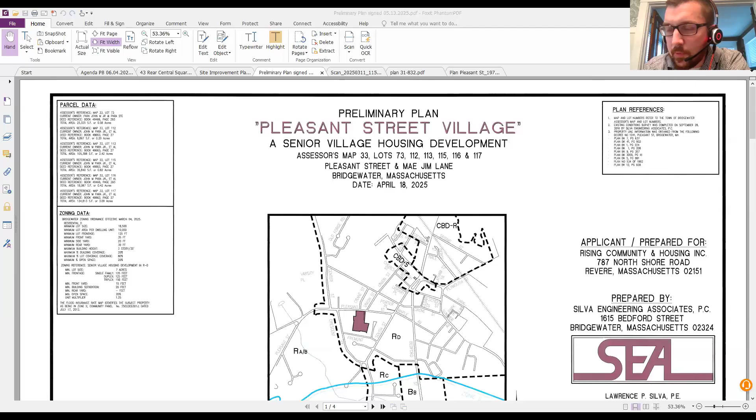Yeah, because reviewing it too, I had a question, because it included a large amount of open space - pretty much up to 40% open space, which seemed excessive. But a fair amount of the open space is constituted through the actual home or the exclusive use areas, where the 20% breakdown comes from the edges, as well as part of the front, behind those lot lines. What does that all add up to?

This open space here that I'm kind of - along the back and the side - that area is 66,000 square feet. And what percentage of the site is it?

The site is I think about 21 or 22%. I think there was some confusion because there's the area up front, the 6,000 square feet, and then around the edges. One question I thought about was that community space area, which I think includes all the open space featuring the dwelling units around the parcel, and it actually includes the area that is the road, because the road will be considered common, so that 70,000 goes from the open front all in here.

It would have to be defined as open space per the definition. Open space can't be paved. The area behind the units, that was the 66,000.

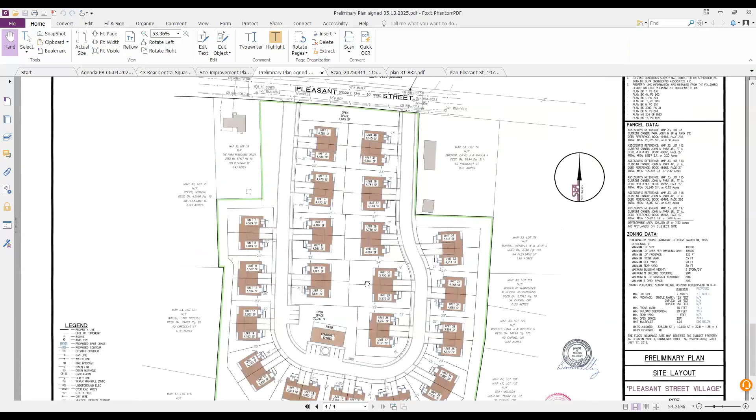That's 20% by itself, I believe. Then you get some on the front, that area along Pleasant Street as well as the area in the back. When I did the math, it was like 21 or 22% of the project.

So I think there just needs to be some clarification of what that square footage is around the community center, because I think that could be added as open space, as well as a patio or pavilion and all that jazz there.

Open space wouldn't be classified as the exclusive use areas. It would be outside that. I'd say that's 22%, that open space that's not necessarily within those use areas. And what's required in residential D?

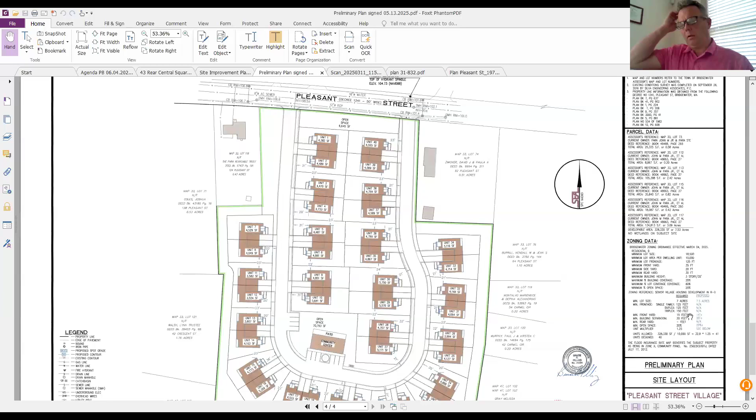Is it 20%? So it's 20% for residential D, and I think the other districts is 40%. But in the SHB, what is it in the residential? It's 20% for this district, for the senior housing village in this district, correct? Correct. Okay, all right, 20% open space as constituted by the ordinance.

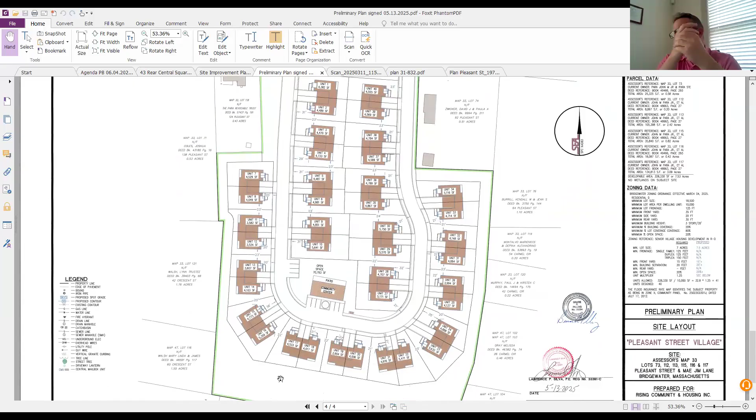In addition to the grass and everything else, correct? Sure, yeah, it's specified open space that's not necessarily belonging to a particular party. And this is at 22, correct? Correct, yeah. And then, based on our definition of open space too, we do allow for some drainage basins and drainage structures to be included as part of the open space counts. Correct. All right.

I think Mr. Walsh, do you have another question? Yeah, I just had a question because I know this is the first time we're shepherding this through, like something through into this ordinance, right?

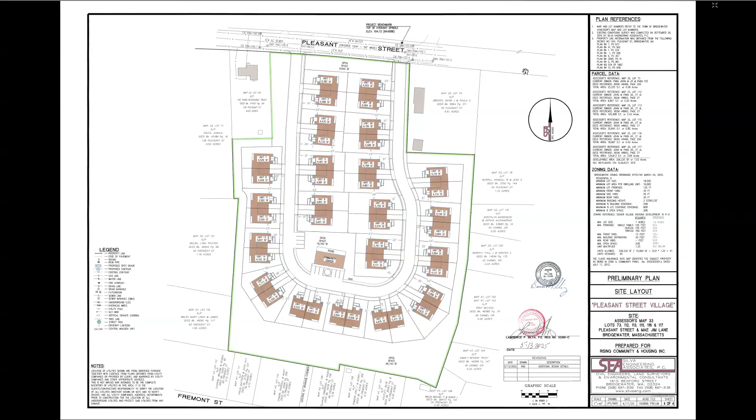Shane, I just wonder, when we were discussing this, part of it was that the open space is really supposed to be there to help folks who are active adults, who have home ownership opportunities, who want to engage recreationally on the site. So I'm curious, if the open space is a retention basin and a wooded buffer area, is that really the intent? I know this is going to be a lot of cost to acquire, so before it goes much further, if it needs to be more.

I would say that there should be some features within that open space area that provide amenities, a pavilion or some sort of outdoor recreation. I would suggest a walking path that takes you around from the roadway sidewalk from one side through to the other. A nature trail basically around through that space would be appropriate, similar to what we did on a different zoning bylaw, like when we did the apartments - we had walking pathways around the backside, went around by the detention basin and around the outside of the buildings.

I would say there's also an expectation through this project that, especially in the residential D, part of the benefit is that it's based around the central business district. I think there's an opportunity for a crosswalk where the sidewalk ends at Mae Jim, either that side or the other side, to allow for residential access to the downtown area, as well as other walking trails.

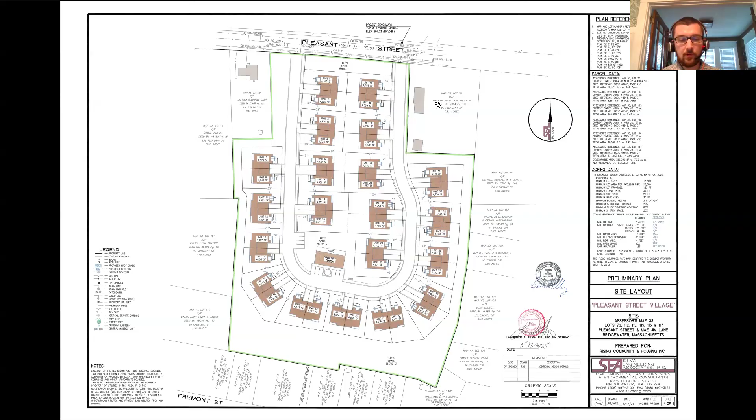But yeah, I do see opportunities within that 20% open space. I think there's an expectation too, after talking to the engineering company, Silva, that for some of these buildings we look for a reduction of these detention and drainage basins by looking for roof drains for these properties. So there's an expectation that on-site roof drainage be applicable for these units, to allow for less impact in terms of the open space.

And the only other thing I wanted to add is that where we show the roadway as two entry points to Pleasant Street, that sidewalk provided there will be looped either internally near the open space or externally on Pleasant Street to make sure somebody could actually go around. And if we combine that with the nature trail through the open space, that gives you another option.

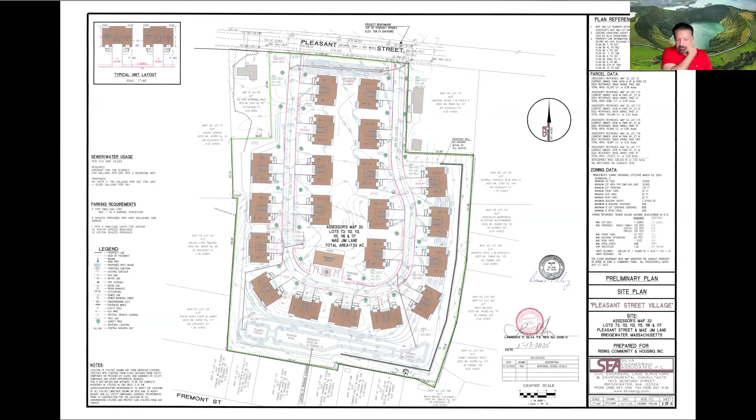Yeah, and Shane, I confirmed on page 65 of our zoning, it is 20. I was thinking the other districts are more, it's 40% in the other districts, it is 20 here. I think the reasoning is that residential D is primarily closer to the downtown area, with closer and more walkable access to parks and fields.

Yeah, but I think the biggest step, or the biggest hurdle before it comes back to us, is the meeting with DPW. Agreed.

Mr. Walsh, anything else, sir? No, appreciate the discussion. Thank you. Thanks, James. Anybody else?

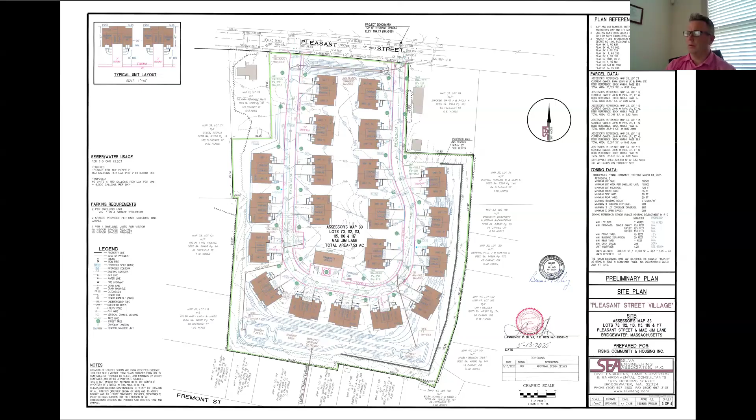Okay, so Shane, we're just going to keep this as an open agenda item until we get some DPW feedback. Yeah, if that's what the board wants to do. Is that what you and the applicant want to do, Mr. Silver? Yeah, that would be good. That way, once that meeting takes place, Shane gets the opportunity to report back to the board, and anyone on the meeting will hear that as well.

Hopefully we can get some feedback, commitments or no commitments, within the next two weeks, so we know where we stand. Because we'd like to be getting out there doing test pits, getting our drainage designed, and moving forward with the detailed part of it.

Okay, all right, thank you very much. Unless the board has anything else? No. All right, thank you. Thank you so much. Item 4, other business.

We don't have the minutes this evening. Shane, you want to talk about the June 18th meeting? Yeah, June 18th, we don't have any ANRs right now, so what we're looking at is 1010 Elm Street, as well as the preliminary discussion we just had of Pleasant Street Village. So it's looking like a shorter meeting at this time.

We don't have any other new public hearings through that time, so that gives the board an opportunity -- I'm hoping at least to get more minutes in front of you guys to review. So that's my goal for the next meeting.

All right, and then just a reminder, June 11th -- that's the downtown Bridging the Vision of Central Square Community Reveal. That's next Wednesday. I believe I provided that information to you guys.